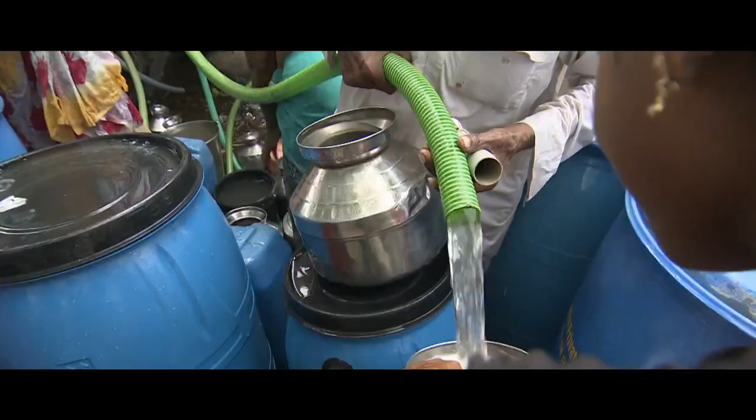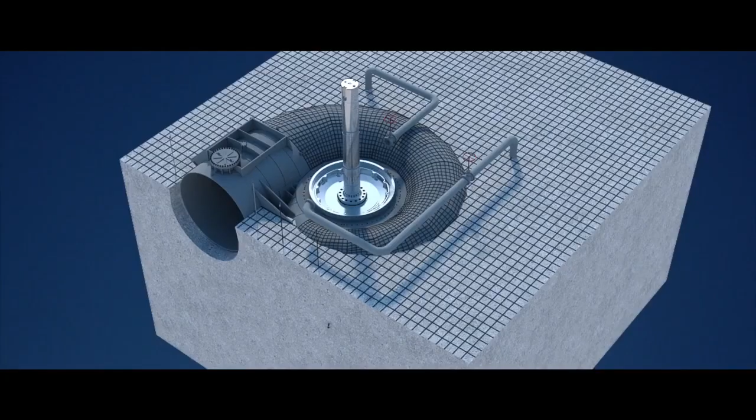Increasingly volatile weather patterns fueled by climate change, crumbling infrastructure, pollution and overpopulation is causing a surging demand for water. The world's water challenges are dramatically increasing, and so are the possibilities to solve them. Xylem devotes its technology, time and talent to advance the smarter use of water. We look to a future where global water issues do not exist.

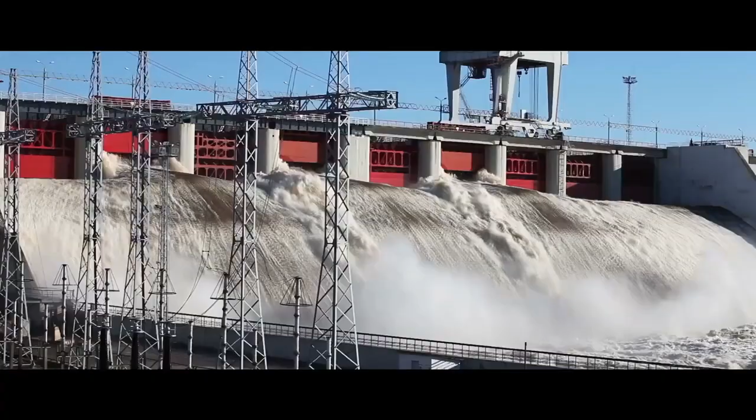Xylem is a Fortune 1000 leading global water technology provider with a century-long track record. For Xylem, innovation plays a critical role. We have development and R&D centers on a global scale. We are now also investing heavily in India. We have a technology center in Baroda, but also in Bangalore, where we are expanding pretty heavily.

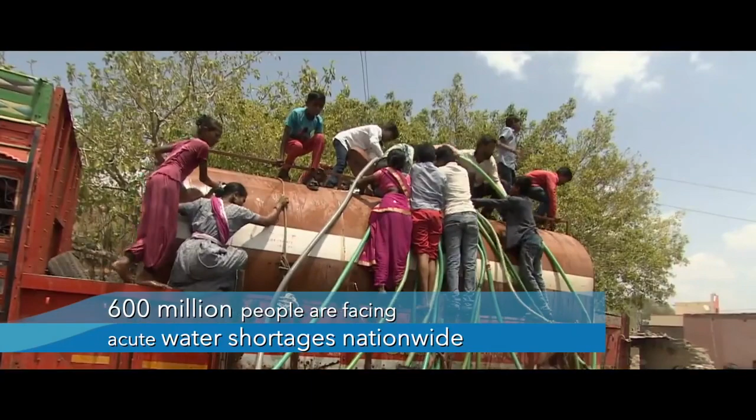India is all set to become the world's most populous country in less than a decade, and by 2050 it will have added 416 million urban residents, according to the UN. Demand for water will reach twice the available supply by 2030, placing hundreds of millions of lives in danger. Already, 600 million people are facing acute water shortages nationwide, and 200,000 die each year from inadequate or unsafe water supplies, according to the Niti Aayog report.

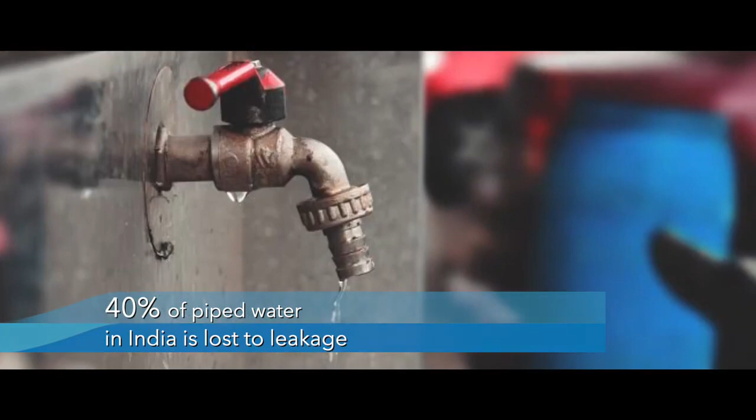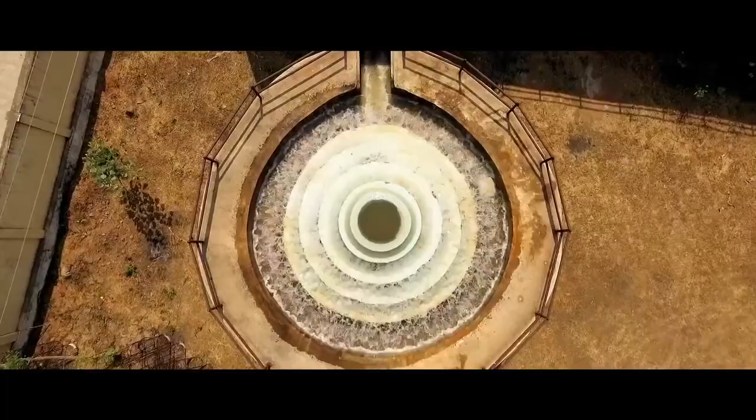It is estimated that around 40% of piped water in India is lost to leakage. Xylem is working every day to bring the latest water technologies and innovation to India to manage water more effectively and efficiently all across the water cycle and help make India water secure.

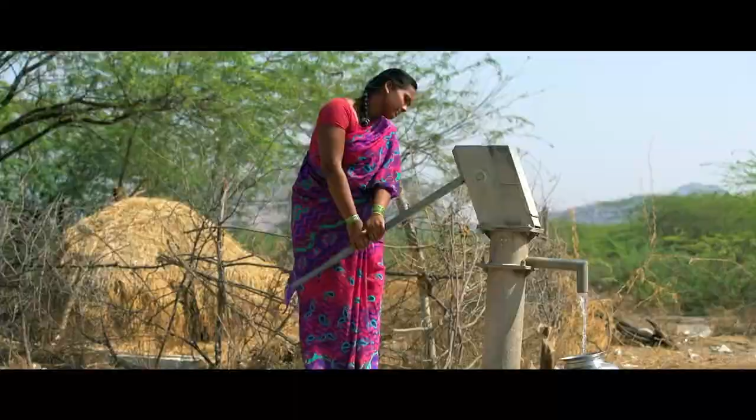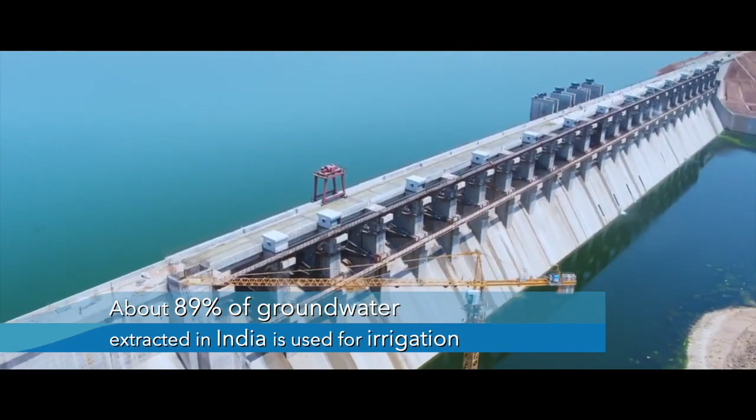India is the biggest user of groundwater. Groundwater meets more than half of total requirement of clean water in the country. About 89% of groundwater extracted in India is used for irrigation, making it the highest category user in the country.

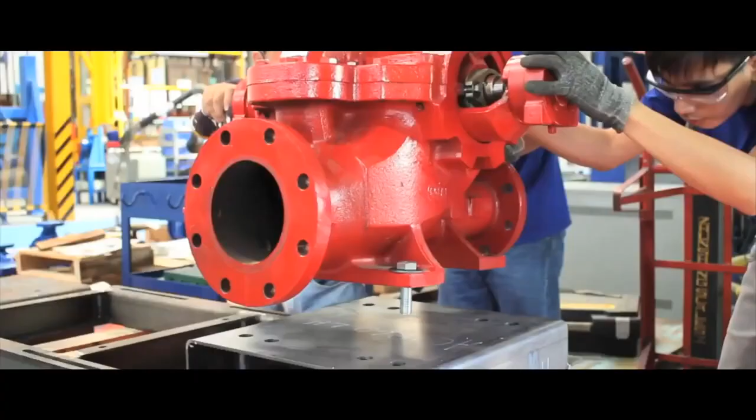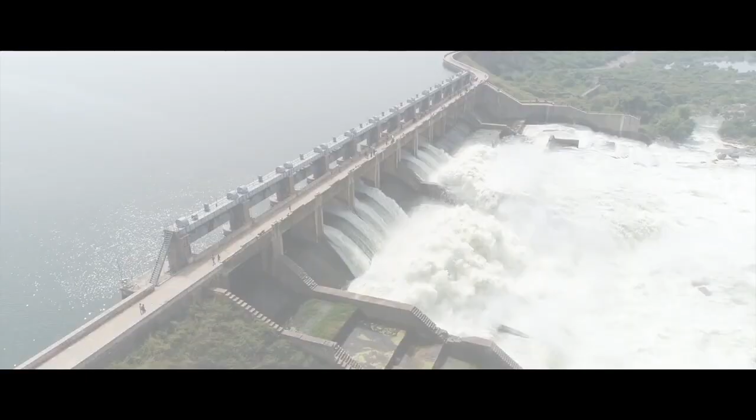Xylem is leading the digital transformation of water, partnering with our customers and innovation leaders to deliver unprecedented insights to optimize existing water systems and creating a future that is more water efficient and more energy efficient. Our Xylem team here in India has developed and designed some of the most efficient and most reliable pumps in the world for these applications. They got the full support of Xylem Global, including our world-class research and development programs around the world.

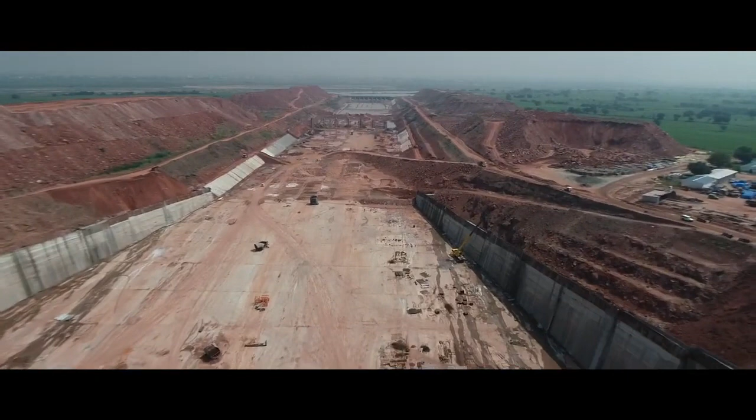India's newest state, Telangana, has a cultivable area of 75.21 lakh hectares, while its net irrigated area is a mere 22.89 lakh hectares. Therefore, the transfer of water through lift schemes and delivering it to deficient upland regions of Telangana is of strategic importance.

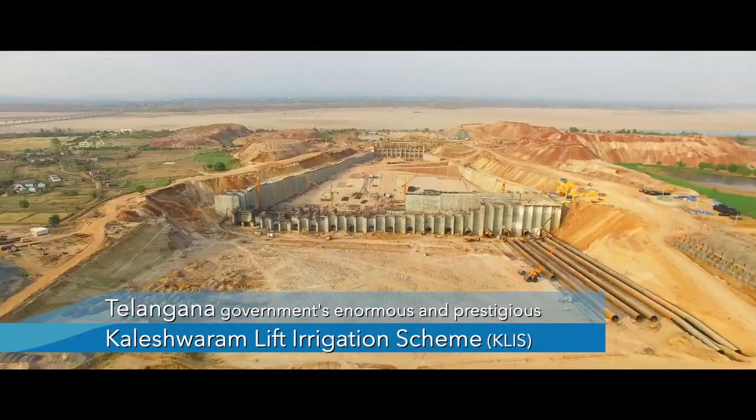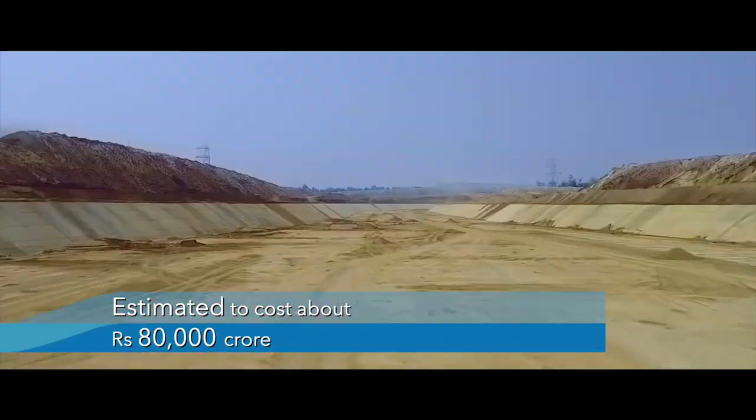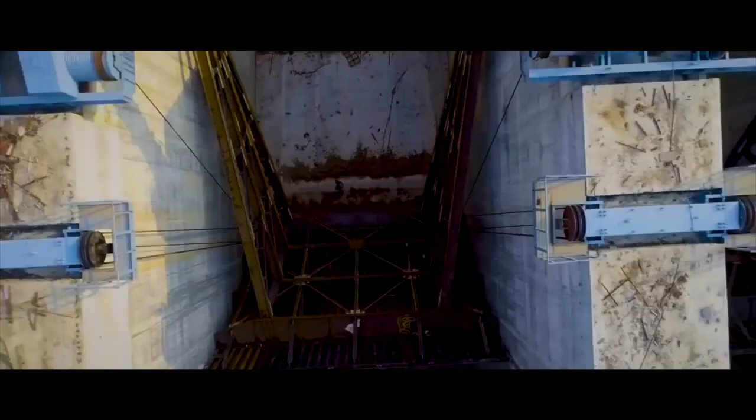In this context, the Telangana government's enormous and prestigious Kaleshwaram Lift Irrigation Scheme, KLIS, estimated to cost about Rs 80,000 crore, holds the potential to change this scenario and end water woes of the state, where many regions are parched. KLIS is the first of its kind and the largest lift-based irrigation project in the world.

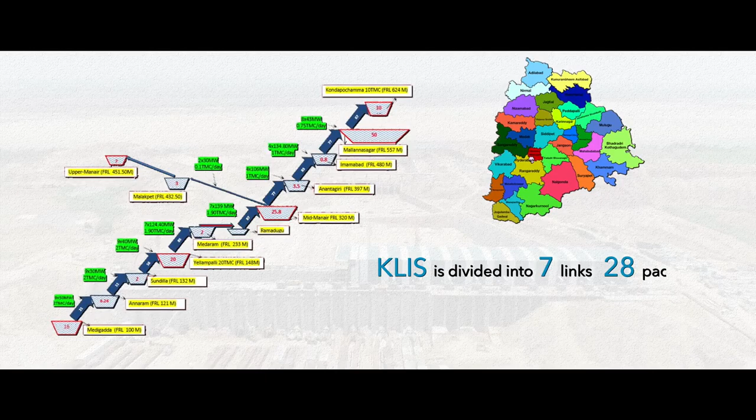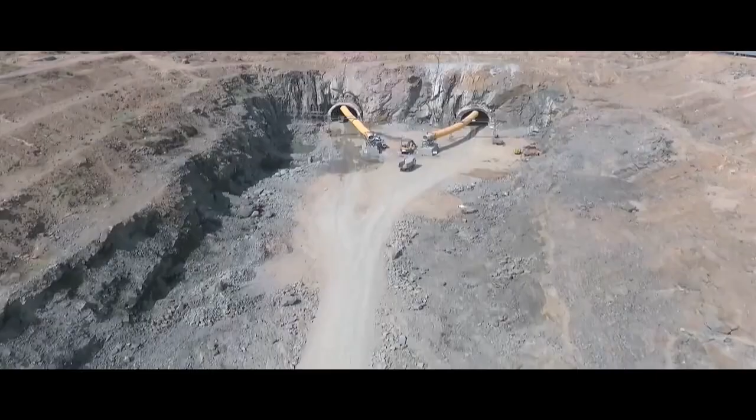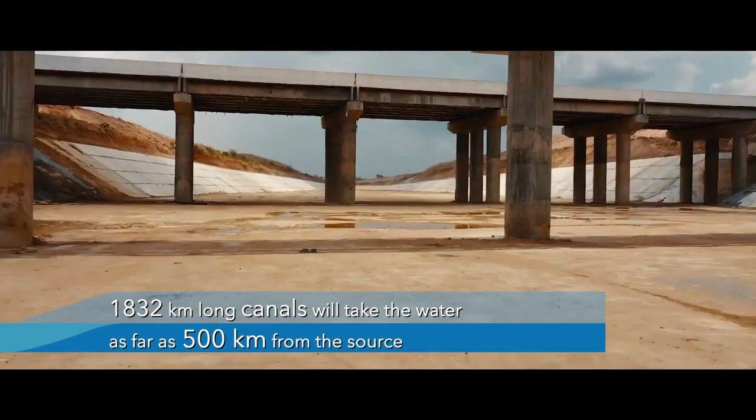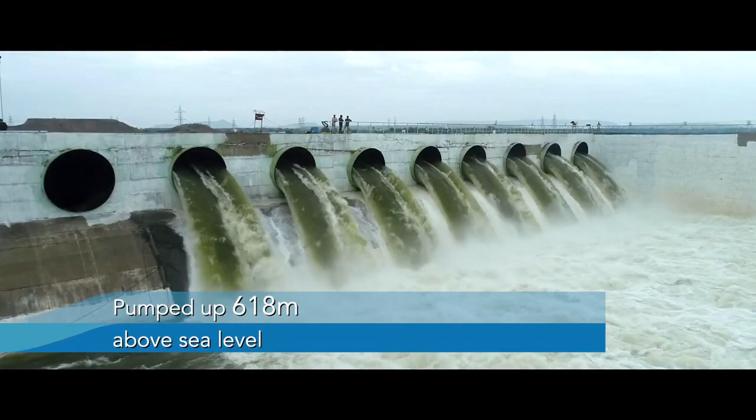KLIS is divided into 7 links and 28 packages to dig up 19 reservoirs in 13 districts, which can hold 141 TMC of water. These reservoirs are interconnected through tunnels about 330 kilometers long. The 1,832 kilometer long canals will take the water as far as 500 kilometers from the source. And ultimately, it will be pumped up 618 meters above sea level.

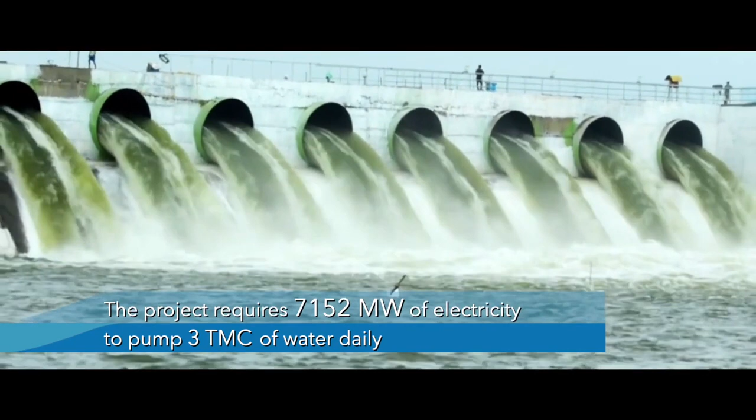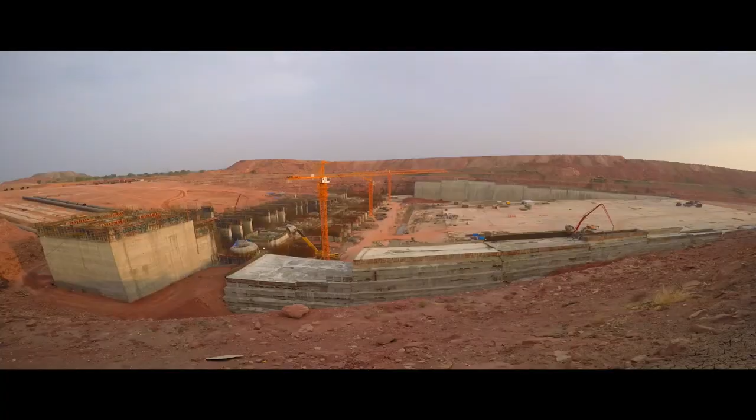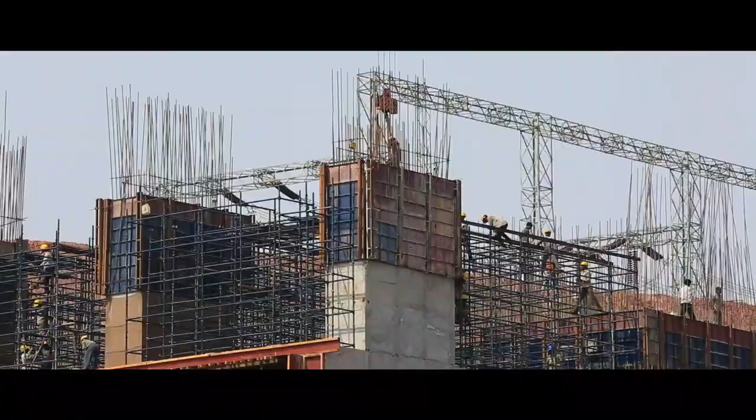The project requires 7,152 megawatts of electricity to pump 3 TMC of water daily. In the first phase, 4,992 megawatts of electricity will be used for pumping 2 TMCs of water. Megha Engineering and Infrastructure Limited, MEIL, India's leading infrastructure company, has completed the construction of the major components of the project, which is looked upon as an engineering marvel.

Kaleshwaram lift irrigation scheme is the largest lift irrigation project in India undertaken by Telangana government. Sundilla project pump scheme number 3 is the one that is undertaken by Xylem, and we are extremely proud and happy to see that this scheme is going to provide several TMC of water for irrigation and drinking purposes in the rural parts of Telangana state.

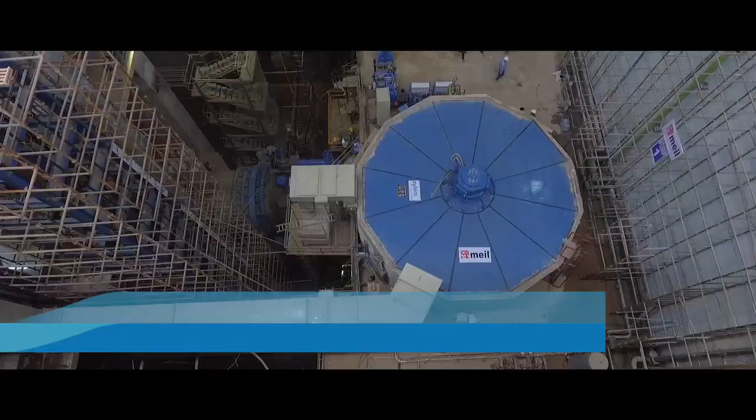Xylem has been chosen by MEIL to supply 14 metallic volute pumps with high hydraulic efficiency for the Sundilla pump house at this prestigious project. Each pump has a 40 megawatt motor and transfers 75,000 liters of water per second. The Xylem India Technology Centre is a group of talented engineers working with our global R&D teams to work on sustaining engineering, new product development, as well as innovation.

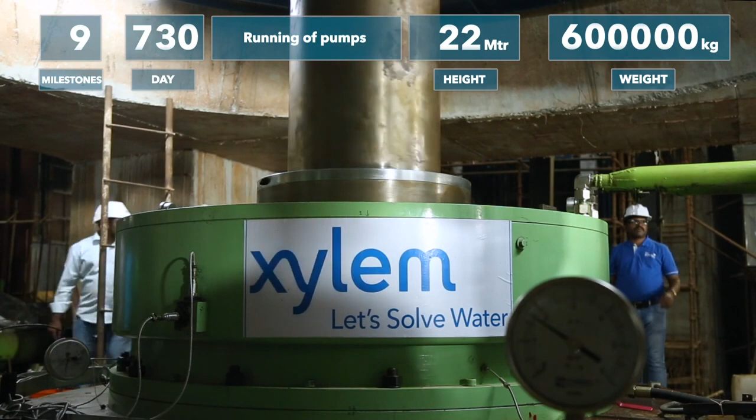The real heroes of Xylem.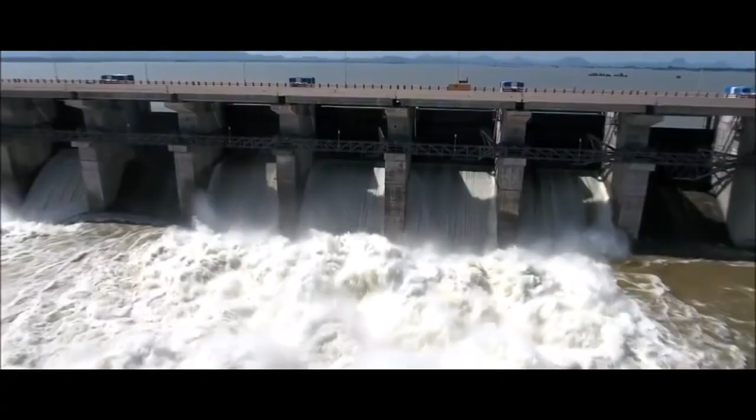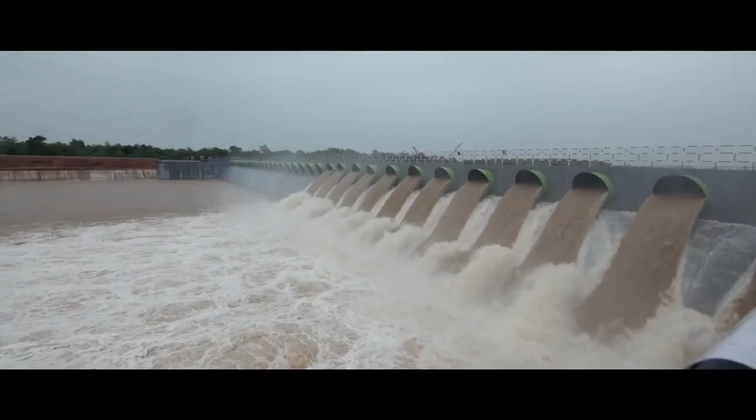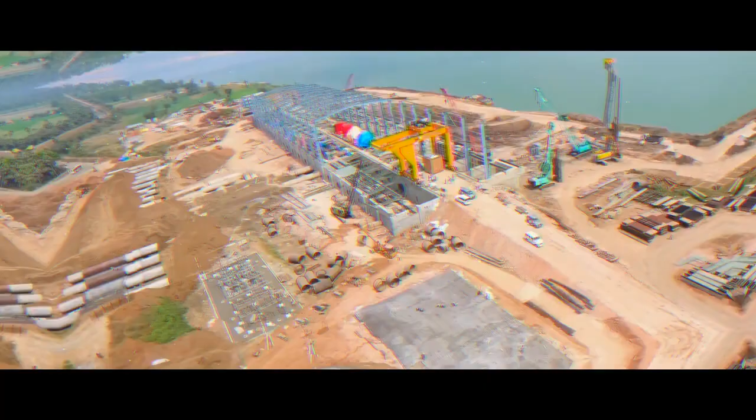Xylem is one of the world's leading partners in lift irrigation projects for pumping solutions and has extended its expertise to many similar projects in India. Sitarama Lift Irrigation Project, Telangana. Chintalapudi Lift Irrigation Scheme, Andhra Pradesh. Kondaveeti Vagu, Andhra Pradesh. Sardar Sarovar Nigam Limited and Saurashtra Branch Canal in Gujarat.

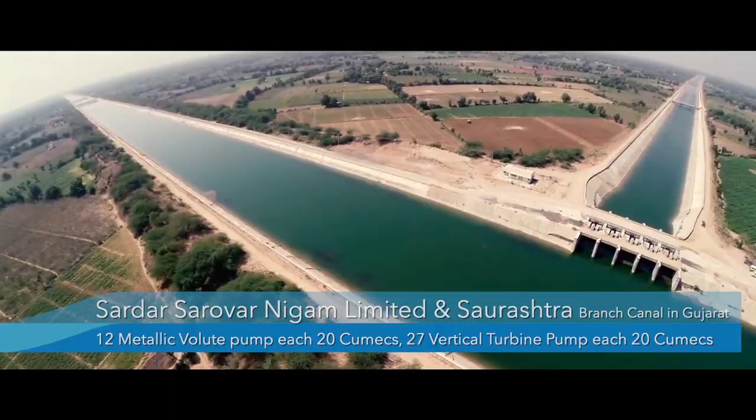The core strategy of Xylem is around 3 focus areas. Number 1 is to maintain and develop the very profitable core business. Number 2 is around smart water and the system intelligence, data analytics and services. And number 3 is to develop the business in emerging markets where we currently are a bit underserved. And of course India is a core component, a very prominent piece.